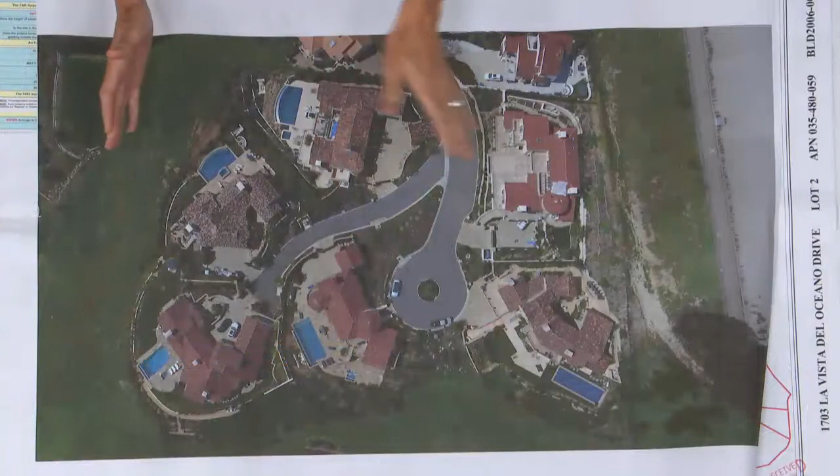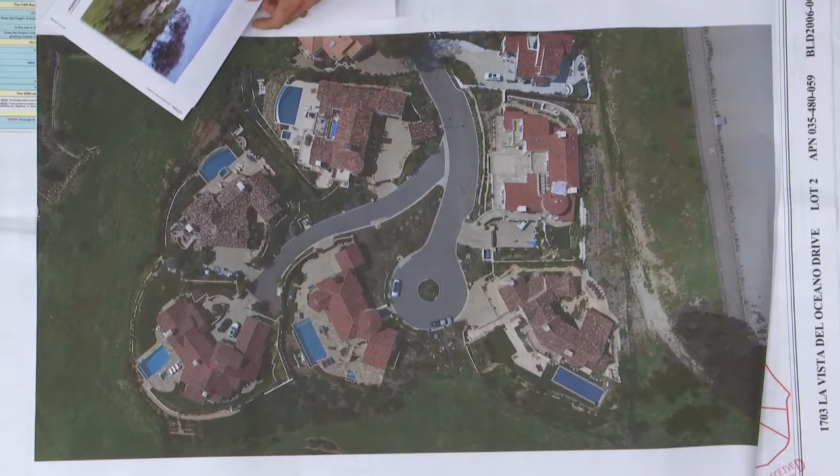Thank you. So these are the 6 lots we're discussing, and you can see they have multiple elevations. This is lot 2, which we're discussing first and foremost. So what we decided to do was get some drone photography done to make it clear all sides of the building, because when you're at the lot and you look at it, it's hard to tell.

Yeah, lot 2. Oh, I'm sorry, 1703, but it's lot 2. Yes, it's this one, right? Yeah, correct. So here, this is the house that we're discussing. This is across the canyon looking back at these homes. Yeah, okay, so it's this home. Here's the aerial - this is from across the canyon.

This is the southeast elevation, which is also, I believe, on the cover of the plans. So we're here to discuss the changes that have been made since the last time the Board of Architectural Review reviewed this project, and we might want to flip through it as I go through the changes. Stephanie Poole was the architect of record - she designed these original plans, and there were changes that were made unbeknownst to the architects in the field. So she was kind enough to come back and do a sort of record drawing of what it is there.

However, there are details she's unable to specify because in this case, pretty much all the windows and doors are different than what was originally on the plans. We don't know exactly which window it was, but we're here to review the aesthetics of what's there and answer any questions to the best of our ability. So maybe if we're going to look at windows and doors, we can go through the elevations and try to indicate where you think the changes were.

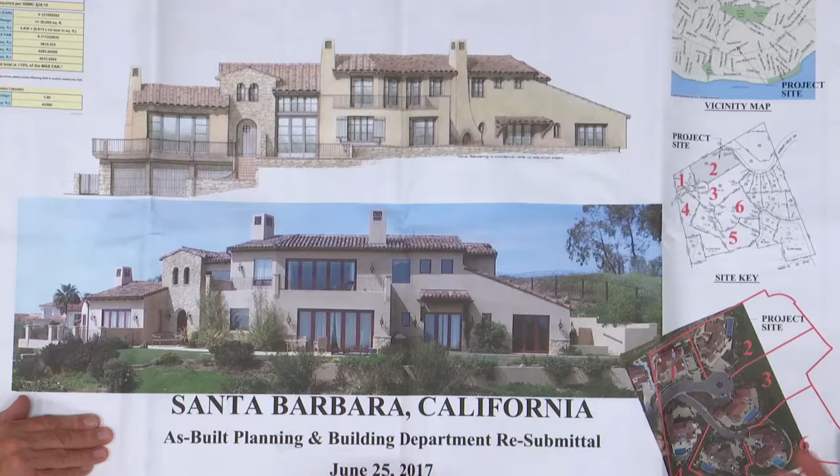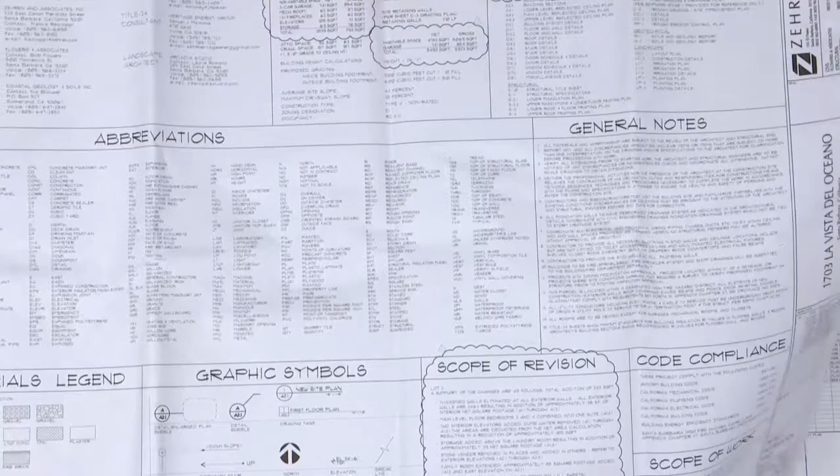So we have a scope of the changes clouded here. All clouds represent the changes we're reviewing today. This lot size did not change as part of the lot line adjustment.

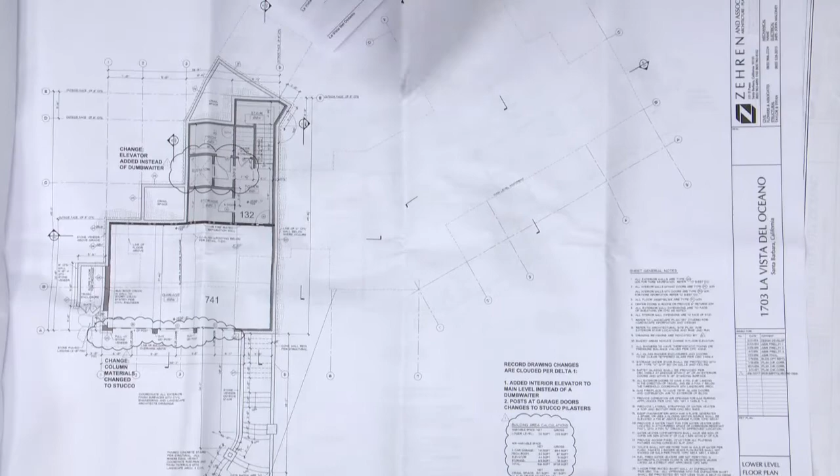Okay, so there was a dumbwaiter. This is the ground floor, there's a 3-car garage. In terms of interior changes, there used to be a dumbwaiter here, and they installed a full elevator. There's actually 2 elevators within the house, as you'll see.

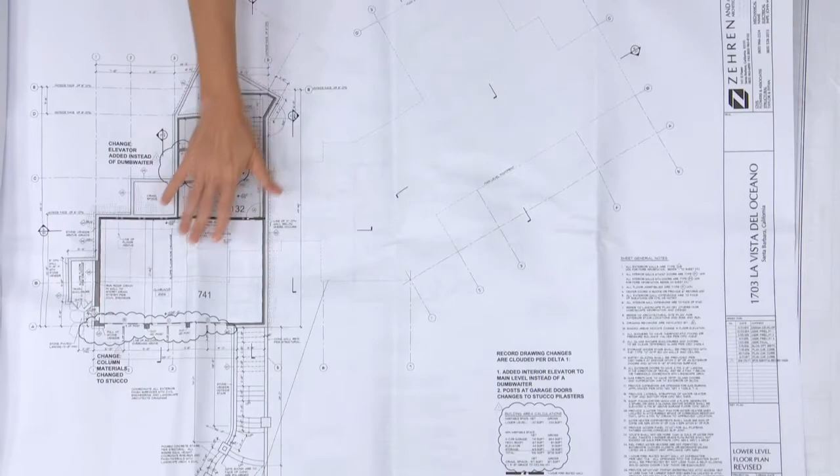So did this outline change? No. Okay. And again, this is over 700 square feet of garage that is now counted, whereas in the past FAR's method, it was not.

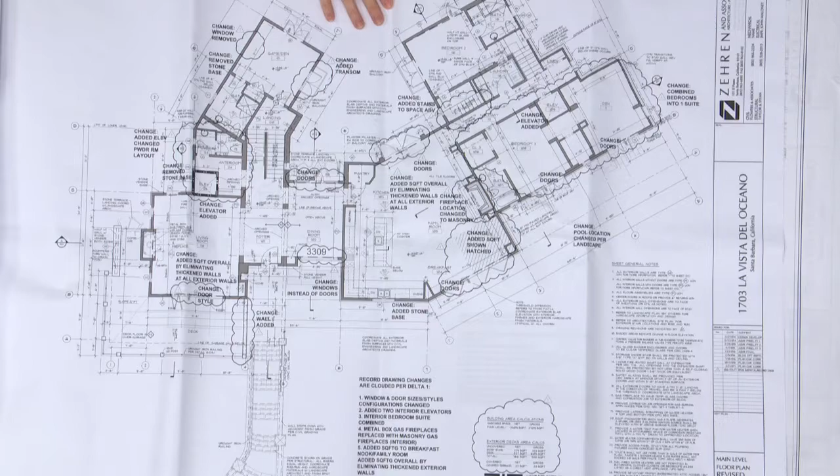Essentially, all the clouds are around the doors and windows that were changed. We had, if you want to speak to it, Stephanie, there's fireplace relocations. The only footprint increase on this project is in the area of this corner of the family room.

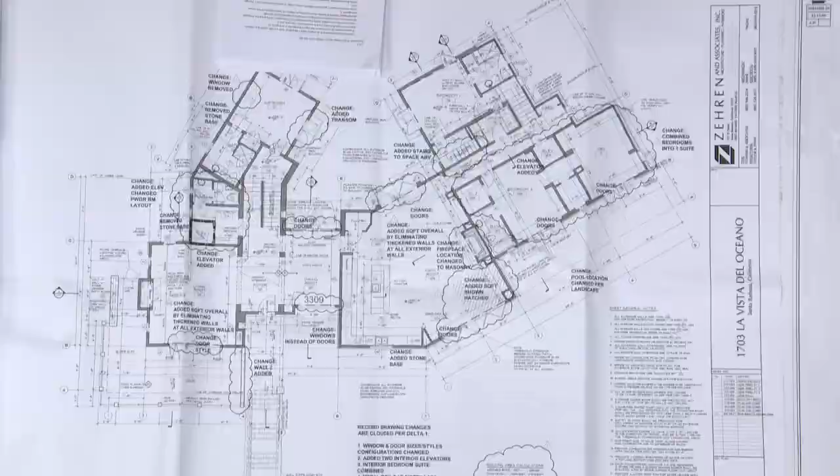Where it was originally cut in, like that, and this area was added. Other than that, the only increase in square footage, like we said, was the garages and some of the thickened walls that were originally specified for the project were not built with the dual stud walls or the thickened walls. They were built with nominal 2x6 or 2x8 size studs, thereby increasing the square footage just on the interior side by that much. It's negligible.

And then there apparently was one exterior change? There's a wall, site wall. The pool was originally built along that entry stair. It was not built in that location. You can see on the site photograph that it was built in another location.

Okay, so just so we go through this pretty carefully, let's go back to the site plan. So where is the pool on the plan? In this photograph, it shows it in this photograph. Okay, so is that on the plan somewhere now? That is the original.

The pool changes are actually not before you today because they were permitted separately, and they did receive a final sign off at the locations. From ABR or landmarks? I mean, not landmarks. We're not 100% clear on that. What we know is all 6 of the pools on these lots all went through city review and got separate permits. They all got building permits issued and inspected.

And I'm assuming then, though, if they got separate permits, then this area is part of that separate permit. Yeah, right, Mr. Chair, yes. ABR did review the proposal to relocate the pool and some of the landscaping changes back in 2007. So the focus of this, all of these home reviews, will be physical to the actual residence.

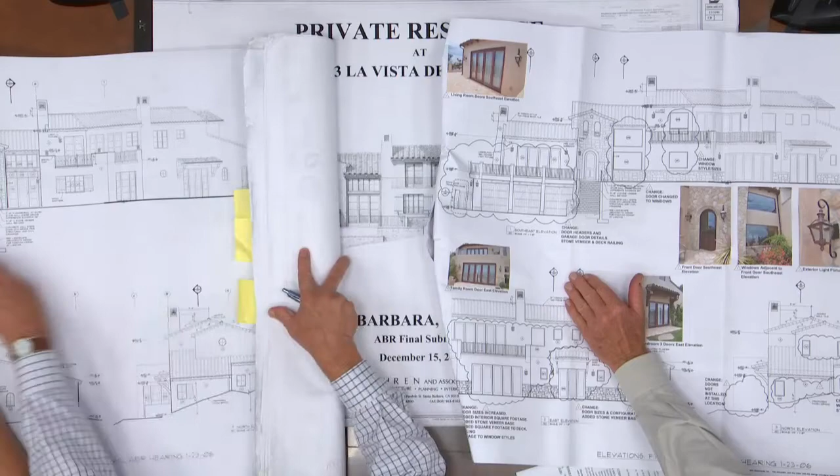Okay, all right. So basically, we have that set of windows that now don't have divided lights. Right, they're shaped a little bit differently from a proportion standpoint. This has - we can't tell whether - oh, it has different columns, wood columns. Had wood columns, it's now stucco, okay? They still have a wood lintel, okay? And we have a different detailed pilaster and maybe a different railing, but it could be the same, okay?

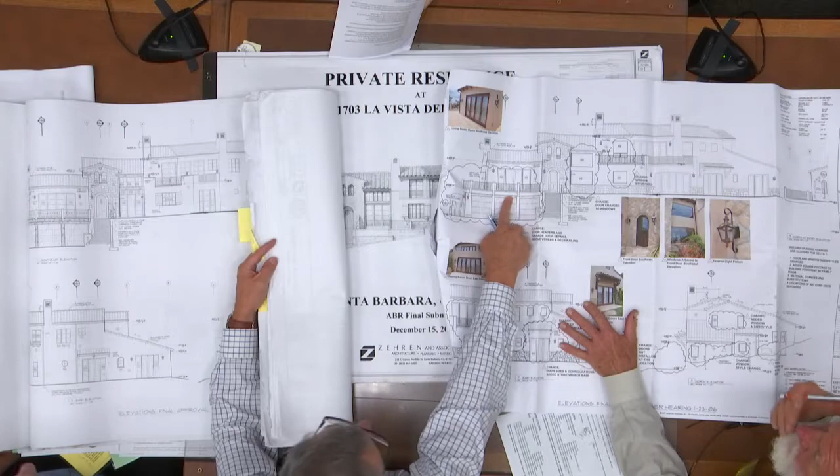All right, then over here, we had - oh, this is, yeah, they made - what are we looking at? This used to have little divided lights and then some large door here, and now it's all just those two big windows. Two big windows right here. Two big pictures. Those two windows, okay?

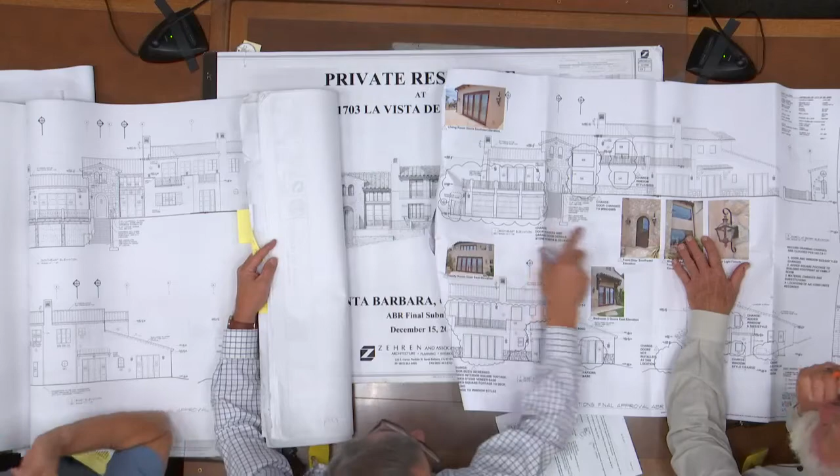And then we had - where are we at now? Okay, those two windows are now this? By the way, these are now that. Right, so what went away? Was this sitting out proud of that surface?

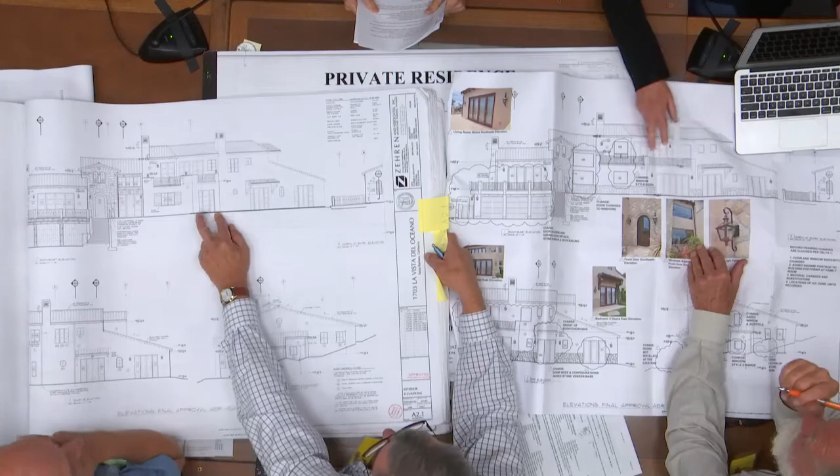This is the area of that increase, and I think this is where the building takes a little turn, right? Turn, yes. So this has got filled in. That was where the piece was added, okay. So those windows are new too, right?

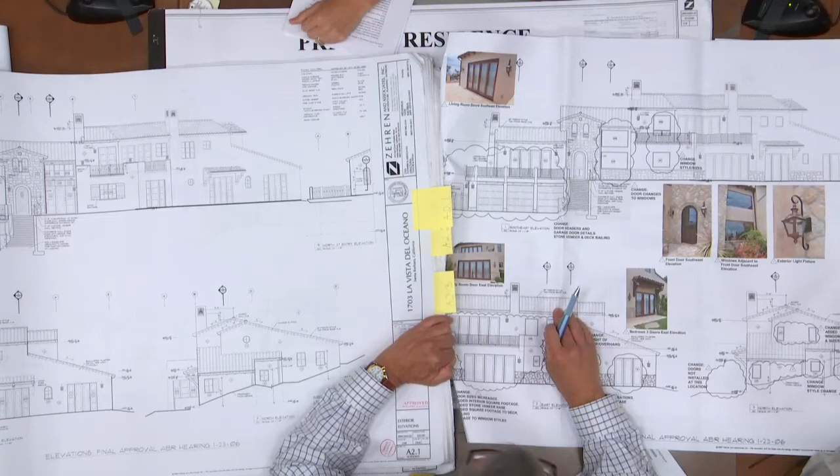On the upper floor, yes, a large expansive - okay, so there should probably be a bifolding type door around those guys. So because we don't have it - it's down here. Oh, here it is. Because - okay, gotcha, it's not a four-sided building. Yeah, you're switching elevations, okay. So we're up there, we got this, that's what got put in, this got put in, and they're probably detailed differently than the way these were put in.

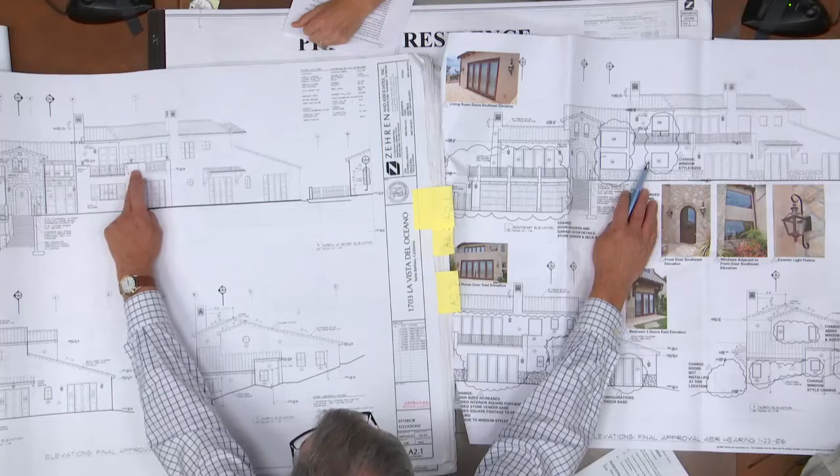So these had shutters, and okay, so this still is proud - there's a terrace still in front of this thing, it just didn't get built this way, and it didn't get built that way, okay. All right?

Where do we look next? Well, why don't we do this to make it easier on us? I'm going to do it a little differently than we ordinarily do it. Let's stop right here and get anybody's questions on that elevation. Anybody got questions? Okay, all right, now let's go to the next elevation, which is...

So it's this elevation, or what are we looking at? That one? You know, I think it'd also be helpful for all of us, if we point out which elevations are the publicly visible elevations. I think we have like six to eight elevations per house sometimes, but really there's like one or two that the public can see or that's prominent from anywhere. So we should make a point of letting you know which those are.

So how about we point to also which elevation by looking at the aerial photograph? Okay, so this elevation's got a change on it. How does that compare to this sheet? Is that this? No, it's this one? Is it this one? That tab didn't get switched. No, I mean you need to turn the sheet over, the corresponding - okay, so what are we looking at?

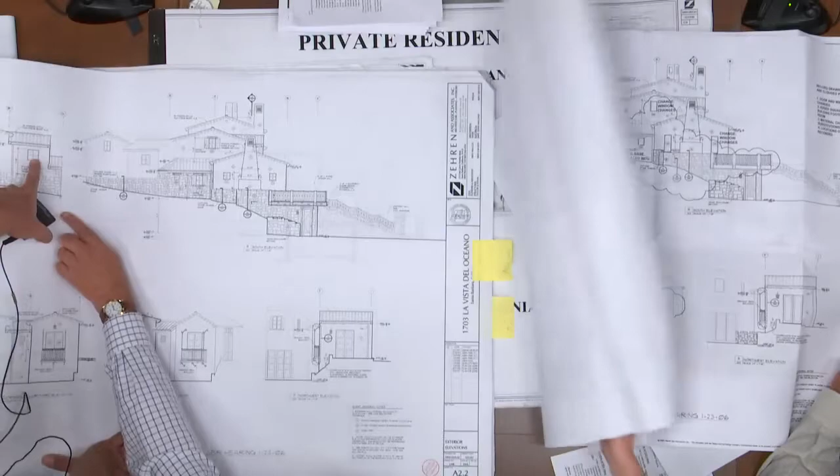Which one? That's the one... oh okay, they took the window out here and added tabs on this sheet.

There's no mullion, they've taken the mullions out of it. So the divided lights went away, and that window went away. Any questions on that one?

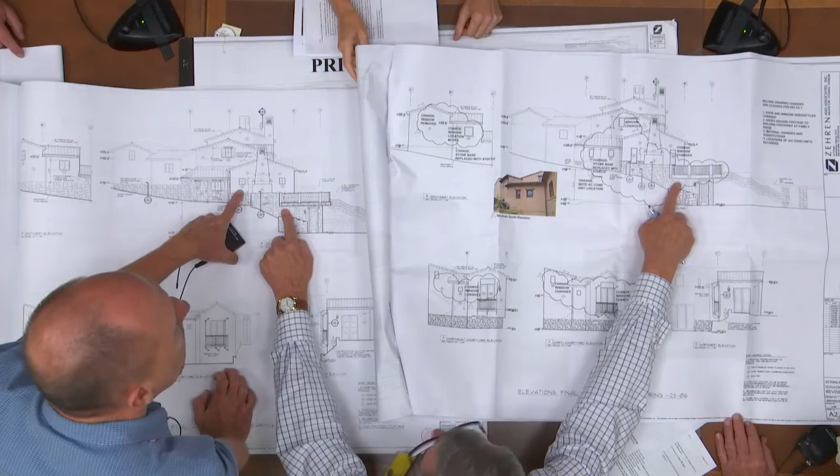Where to next? Right here, that's the same as this guy, right? Okay, so this is slightly different. Oh, and they put stonework here. No, they only put partial stonework, then took it out.

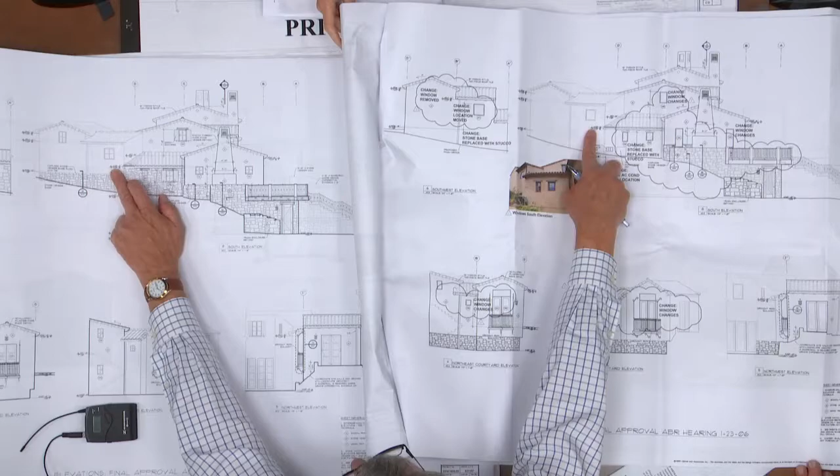So they took all that stone away, then took the shutters and lintel off. That window replaces that window. These two windows replace these two windows. That's the one we've seen on the corner. Any questions there, guys?

All right, then where's this guy? Right here, so they added a clerestory window above the double doors. And the balcony is kind of the same.

That's not a window? Is it? What's happening up there? Yeah, it is, a clerestory window. You got a photograph of that? Okay, all right, any questions there?

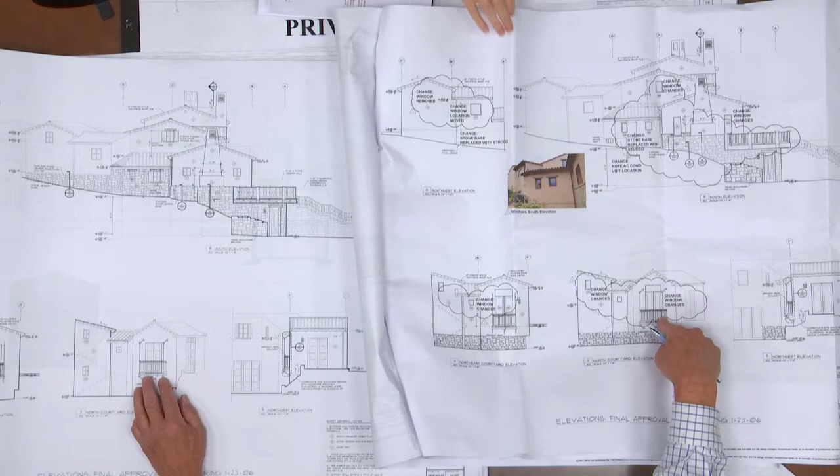All right, then we're going to here. That's just that, right? Okay, was there a change in this little balcony from what was approved, or no? It looks like it's the same, maybe just stylistically. Still got a little curly Q, so it's kind of more or less the same.

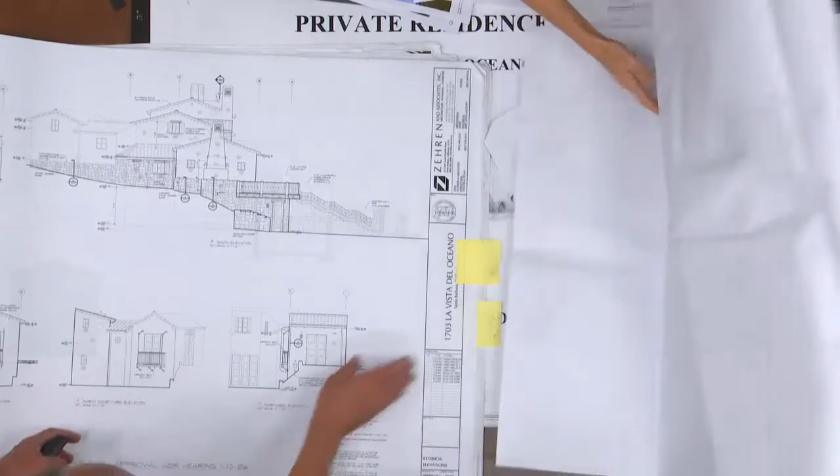So here and here, the windows got changed from this arrangement. The stone went away, the balcony is still there. Oh wait, stone got added here, this is new. So stone got added over here, the windows changed.

Those doors lost the divided lights, and the balcony is still there, and this was some kind of plaster. This was round and it's become squared, okay. And that little window is there, but it got changed in how it's used.

And what are we looking at? Oh, that's the same elevation, that's this door area. These were two French doors and now it's a triple slider. A window up here got changed too.

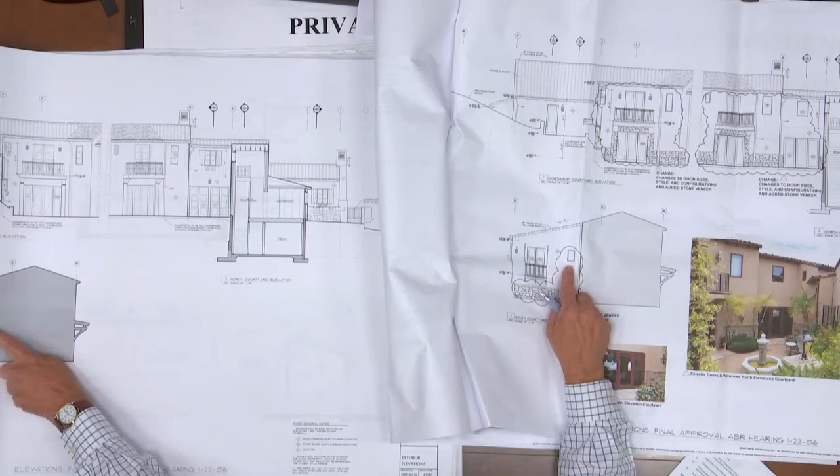Okay, and this is the back of the house, right, facing uphill. Where is that guy? Over here, so that got changed, but there's nothing above it, it's right to the top of the reservoir hill, not visible to anyone.

Okay, let's go. Did we cover everything? That's it in terms of the elevations. We can go back to the floor plans if you want to compare those.

Right. I think we were on... this is where we looked at that, we looked at that, looked at that, we looked at that.

Looked at that, looked at that, looked at that, and we looked at those things, okay? That's the interior courtyard that faces uphill.

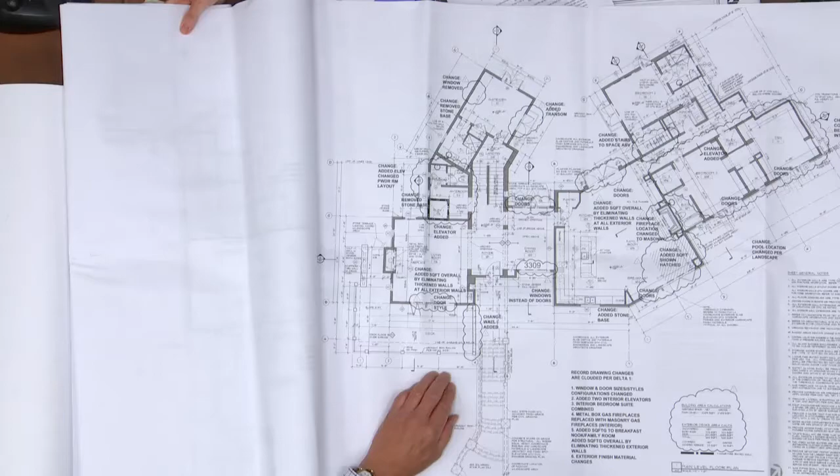Interior changes to the layout of this room, and this is where the second elevator was placed, put in. But that didn't affect the exterior at all?

No. And the only change here is the fireplace got moved, so I assume the chimney stack is in a different place, correct? Correct. But it looks the same?

It's only slight, because it was designed as a 45 in this corner, and this chunk was out, so it's kind of in the same place, wasn't here, so it's really close.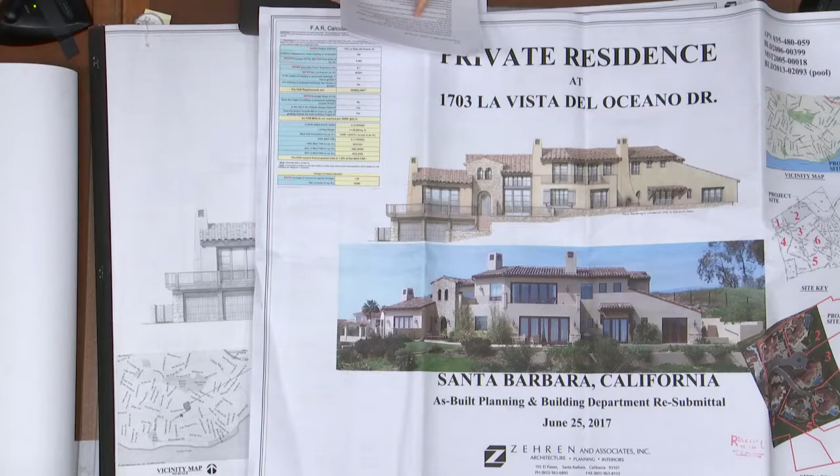We discussed the wall thickening changes. We combined that 3 and 4 bedroom on that floor, which did not change the exterior. The elevators, we discussed. There was storage added above a laundry room. We could look at that. Okay.

That didn't affect anything outside of the house. This is the laundry room. You go up half a flight here, and there's a little closet, and they just created this storage area up here. It was basically designed as attic access. We weren't sure if it was usable space or not. Whenever the contractor found space that he thought was useful, or slightly useful, he finished it. Okay.

Okay, so we discussed that. The stone veneer was removed in some places and added in others, as we saw. The family room was extended approximately 85 square feet in that corner, like we discussed. The windows and doors changed.

We had a change of windows from doors. We had folding glass doors added in places where there weren't otherwise folding glass. The fireplace moved.

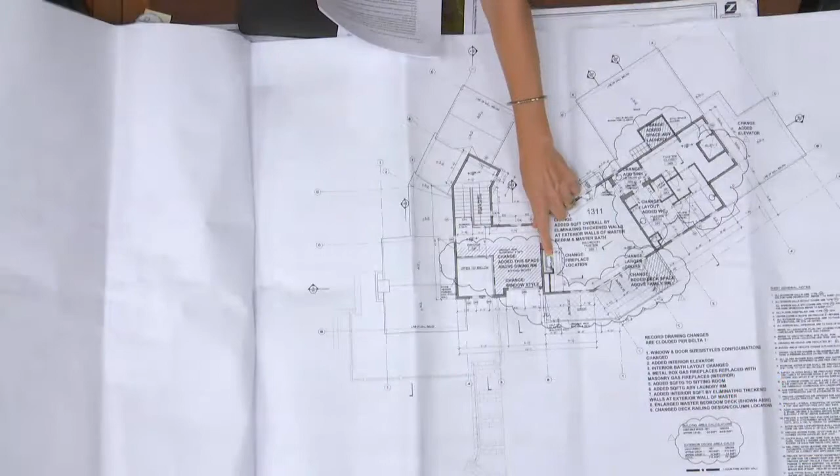There was the second floor and this next floor where this was essentially a loft type — it's a bridge. And that got filled in? Exactly. Okay.

And we discussed the pool relocation was under a separate permit. That's it, that's it. Okay, was there — what was going on there, that place above the first floor where we increased the footprint? Okay, no, we didn't, but it got done.

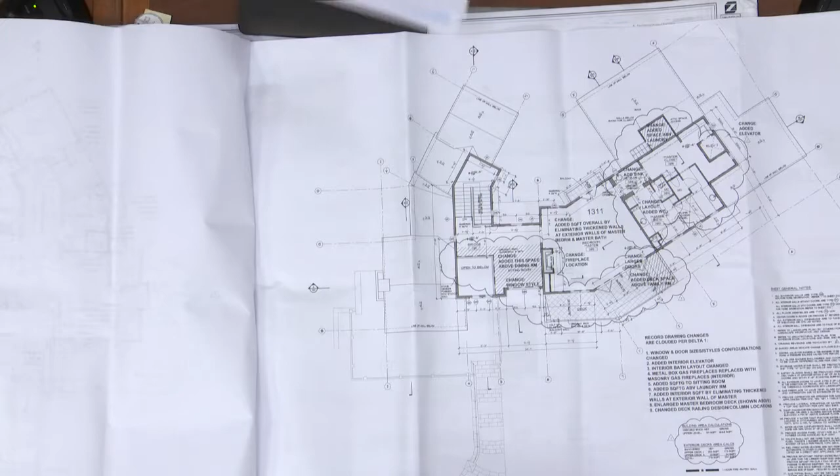One other general question on the doors and windows: typically this board looks at what's been specified. Is it metal clad? Are they wood windows? What happened there — are they generally more or less the same kind of windows? Yes, they were metal clad — aluminum clad wood windows. They were Sierra Pacific specified. There's something else now, but it's still metal clad wood windows, I'm not sure. They didn't put in vinyl. No, so it's still metal clad wood windows.

Yes. Okay, were there any significant exterior light fixture changes? Did they move, I mean other than — we didn't really get real specific with those to begin with. We had, I don't know if in the original drawings those were blessed or approved or whatever.

It also appears that the roof tile system — that's one thing this board looks at when we look at this style of architecture — appears to be traditional two-piece mission clay tile. We've got two starter rows. Looks kind of like it's all supposed to look. I was out there this morning, looked at both these houses and the other ones, so I'm going to have a question on one of the other houses.

Okay, anything else? I don't believe so. Is there any further questions from the board? Yes.

Has the landscape been significantly altered? Generally, no — some of it's died off because of the drought. The landscape plan is over 10 years old, so it hasn't been wholesale replaced with any new types of landscaping, but it's thinned out because of the drought. I think also all of these homes have a very limited amount of area to plant because there are such steep and sloping sites, and they eventually just all go to natural outside of the building envelope area. So they're only developed immediately surrounding the house.

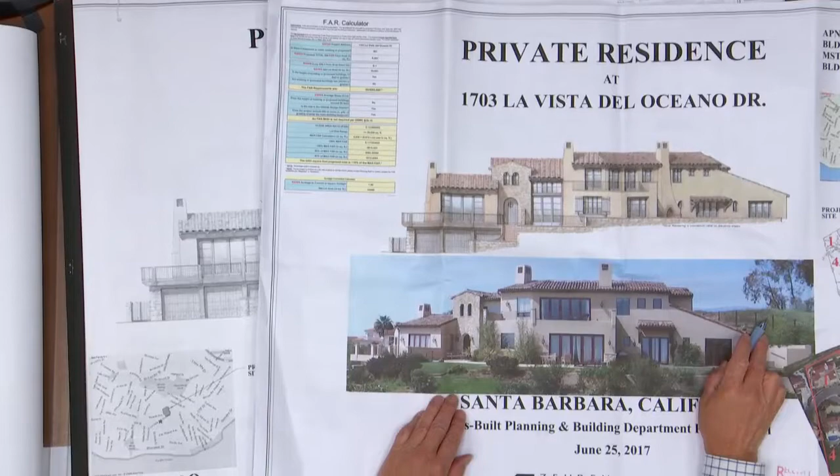Okay, I did have one question on landscaping — or it's not, it's kind of architecture related. Let me go back to this front photograph. This fence up here appears to be — are we allowed 8 feet or 6 feet without any special review for fences? I don't recall, it'd be 8 feet. Because it has this curled out shape, so was that blessed as part of the landscaping stuff, or we don't know?

Mr. Chair, I'd have to investigate that. All right, thank you. I believe that fence is actually the Vic Trace Reservoir's fence. Oh, okay, so that's a city fence, there's no fence from this property. That's why it curls towards us like that — to keep us out. Okay, I was looking at that and wondering where that came from. Okay, that's clear. Any other questions?

All right, well we're here for comments, and as I understand it, we're here to review and make comments. We can either make comments and have the applicant come back with changes, or we can say everything looks fine and give approval for review after final. Is that correct, Mr. Chair? More or less the two options. Okay, all right, let's open it up for comments to the members of the board. Share your thoughts, Lisa, you want to start?

I'll start, yes — that the changes have been well presented and don't offer any... there's something going on with my mic. Is it working? You may need a new mic.

The changes that the applicant is proposing don't pose any significant aesthetic issues, and I can support the project. I'm going to support it as presented. Yes, we've covered everything. I think the revisions are fine with me.

Those are cheap-looking windows. Even though they might be wood metal clad, they ignored the details. They didn't set them back in. These are all more or less south-facing, they take a lot of sun. The original design took that into account. It's just really disheartening that somebody's going to spend a fortune buying these homes and they're not getting what they should have gotten.

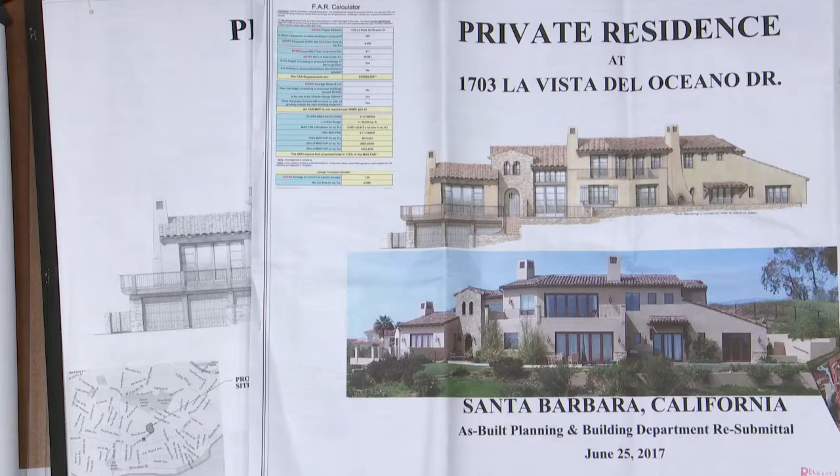And I can understand - we've had many clients come to us and propose a lot of stonework, and then they find out what it really costs, and they come back and say, hey, we got to take the stone all off, and we say, okay, fine, we understand. But we also understand all this stuff costs money. It's just really, really unfortunate that somebody made a decision to not spend the money in the proper place, particularly as pointed out by the folks sitting here at the table today, particularly on the public side where we all have to look at this stuff. Somebody spent a lot of money on a very nice home, and yet they've got some really cheap solutions. So, in one respect, I could put my foot down and say no, go back and change all these windows - get it right. But as has been pointed out by my colleagues, that's a tough decision.

I know that you recently made a similar decision on another project, which I was against and expressed my opinions, and in fact was in the minority position on those votes. So anyway, those are my comments. If there are no further comments or questions, then the chair would look for a motion.

Mr. Chair, if I may, I'd just like to point out that they do have to pay double fees when they come before you for as-built work, but in the realm of how much these houses cost, that's nothing. I'd also like to point out, if you do decide to request that they make alterations, please cite a guideline for why you don't support the as-built changes.

I have a question: did the contractor just do these on his own? They weren't sold yet, they were just being developed. That's what happened, and I agree with everything Fred is saying. All I would clarify is that what you see in the photograph is actually what was present when the people purchased the house. But yes, they did dumb down the window details and things. The contractor did, on this project in particular.

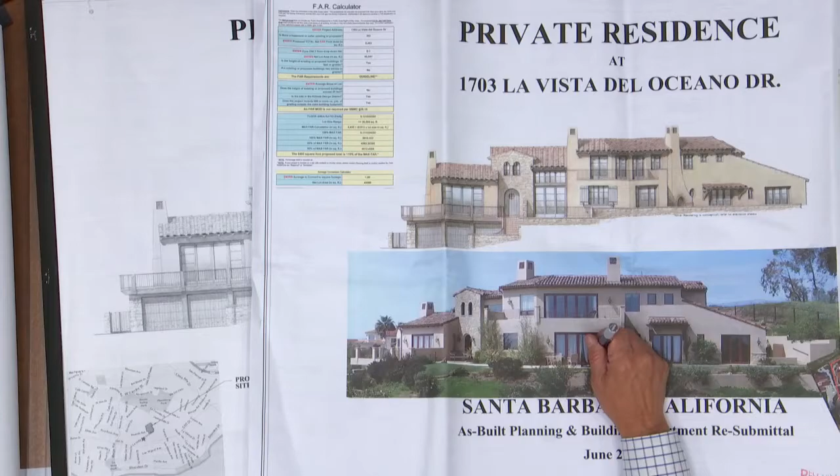Chair would entertain a motion.

Nobody's ready to make a motion? Okay, I'm going to attempt a motion, and you can vote it down. If it gets no second, the motion dies.

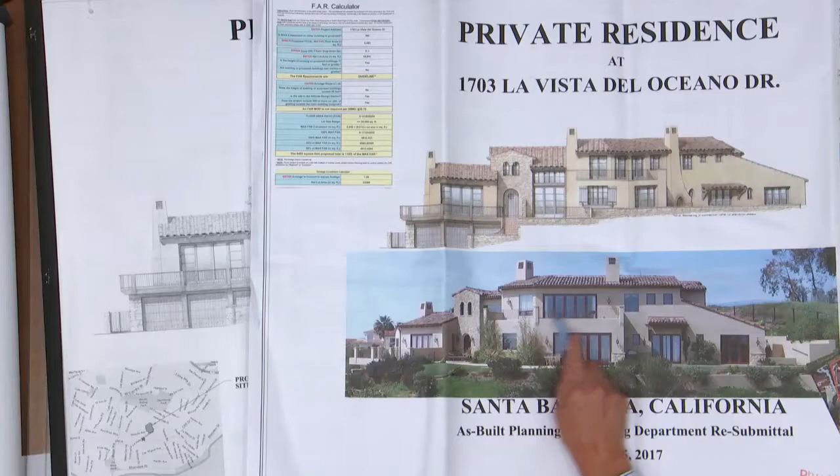But I will make a motion that we require the applicant to revisit and return to the board with a design that would adopt the original intent of the approved design for this window, that window, that window, and this group of windows, and this canopy.

I'll second it. There's a second on the floor. Is there further discussion to the motion? Okay, that's the motion on the floor. All in favor signify by saying aye. Aye. Opposed? Okay, so carried.

So we'll have to see you come back. One opposed? You're opposing. Okay, so we have a 4-1 vote. Any abstentions? Okay, so that motion is approved, and you'll need to come back and show us an alternate approach to dealing with those group of windows.

Could you please circle the windows? Probably for the record, we better point out the elevation points. Let's see, the windows are numbered. This one here. Okay, 205, is that correct?

That's the second story. A circle on the elevation might be best. Take a pencil, circle all over. Use a red pencil, that's better. Thank you.

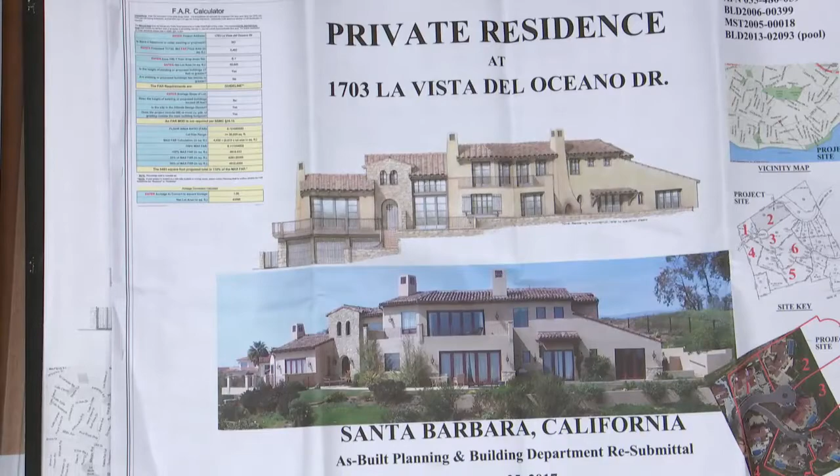If you could do it on two plans so I can have a set for the record as well, please. Okay, that one, that one, that one, that one, that one, and this thing. Okay, so do we have another set to mark up somewhere?

Actually, maybe keep it over just to be sure they match. Okay, and that. Whoops, and that guy. Okay. That's the action on that project.

Do we have a minute to clear all this stuff away, or do we have another set underneath there? Can I have one of those sets of plans?

Sure, that's not what I had on the floor, that's not. This is the old plans, and they're all... okay, yeah, here's the other one. Here, check this. Yeah, we need to keep one, so you know what we're talking about.

Okay. We want to, could've pulled that aerial back. Take all the windows, but pull that aerial back. At least some of it is still to go.

Okay, let's go to item 2, which is 1706 La Vista del Oceano.

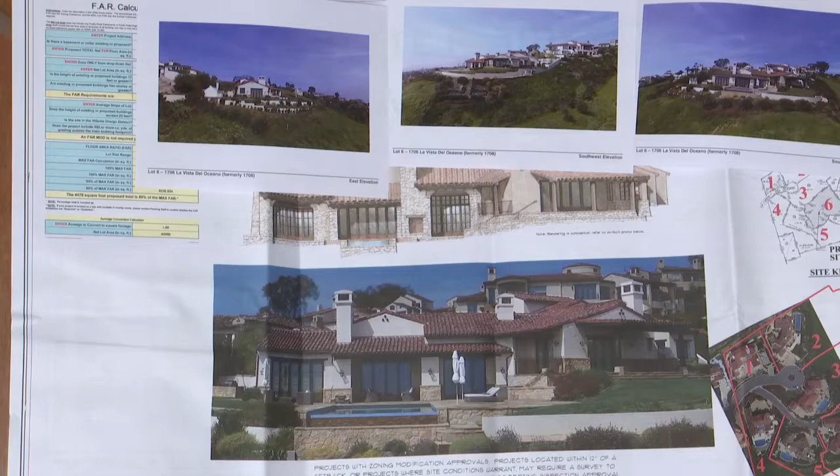A trash enclosure was eliminated in lieu of a site wall that was in place. And an outdoor shower was added, and a mechanical room was converted to a powder room that's used as an outdoor kind of potty for the pool. Okay, or potty. Yeah, okay, all right.

So if you could point that out on the plan and the elevations, please. Just pass these along if you want to look at them. The outdoor powder room is not conditioned space, so it wasn't counted in additional square footage. So this, what was the second mechanical room, is an outdoor bathroom, and there's the shower.

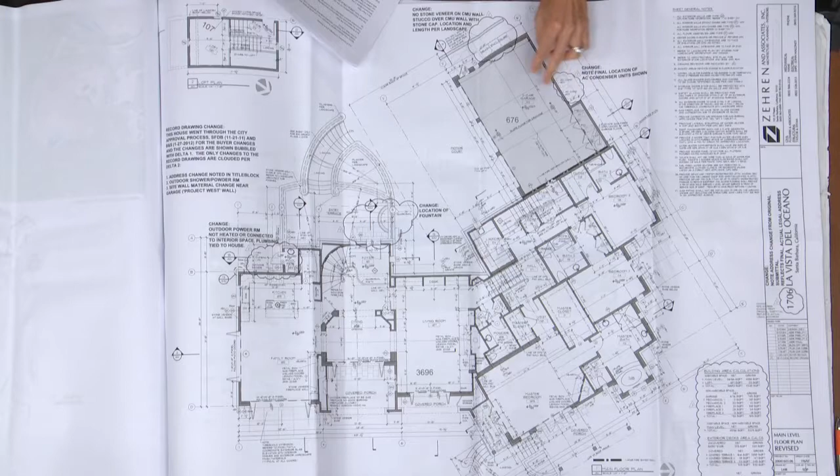There was originally the fountain by the front door was on this side. It's now on this side. The trash enclosure wall along here had stone veneer, and now it's stucco with a stone cap. The air conditioning units were added. And we'll see on the elevation the garage doors, and the same thing where there's stucco in between the garage doors.

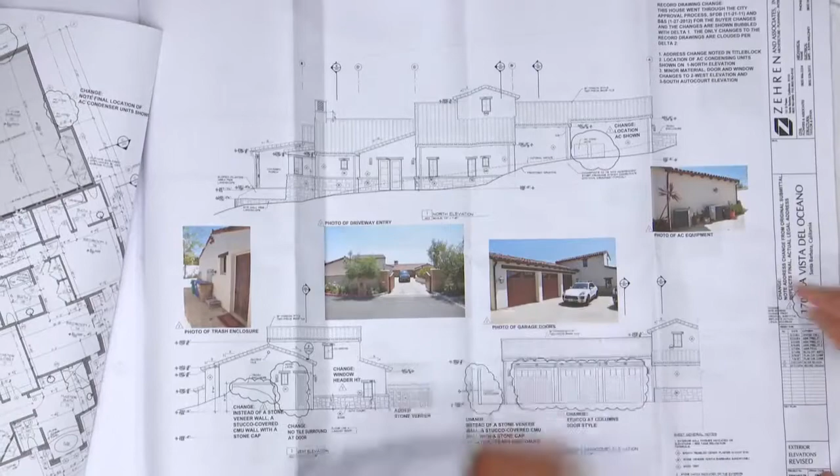Okay, so those are just the locations of the air conditioning. And just to be clear, the stucco in the garage doors, that was previously reviewed in 2011, correct? That's not clouded here. Right, because we looked at this the last time. The garage doors are clouded. Got it. Right, we looked at this the last time it was before us, because it did come to us.

And we do have the building sets of plans underneath if you want to use it as a comparison. Right, so these got added, is that what we're saying? They were never shown because mechanical was design build. Right, and there's no zoning setback or anything like that, okay? No. Right.

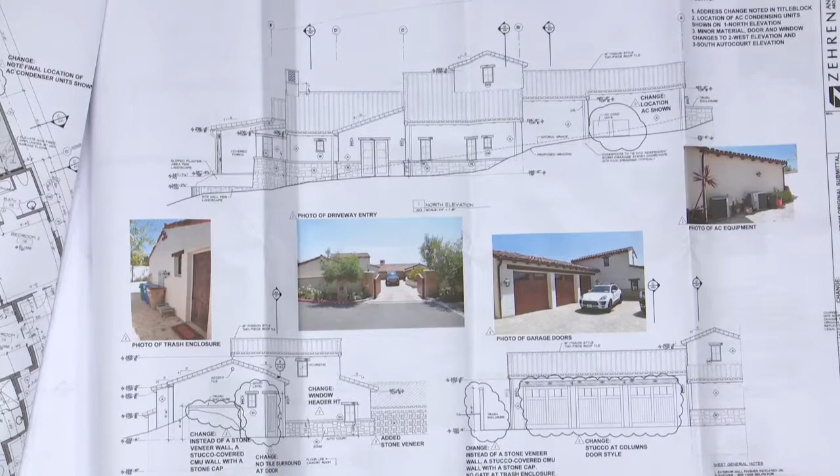And this is the little fountain that got switched. What happened here? Just the front door. The shape of the front door was changed from an arched door to a rectilinear door. Same here?

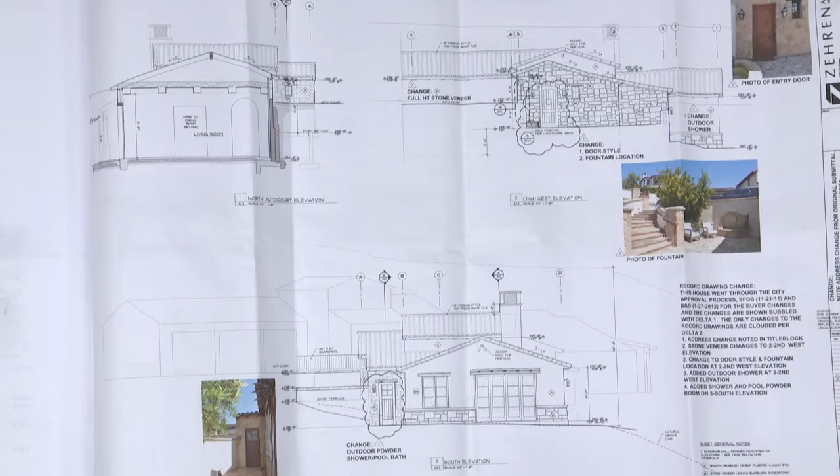Anything else? That's it? Okay, questions? Anybody have questions? Okay, no questions, let's go to comments.

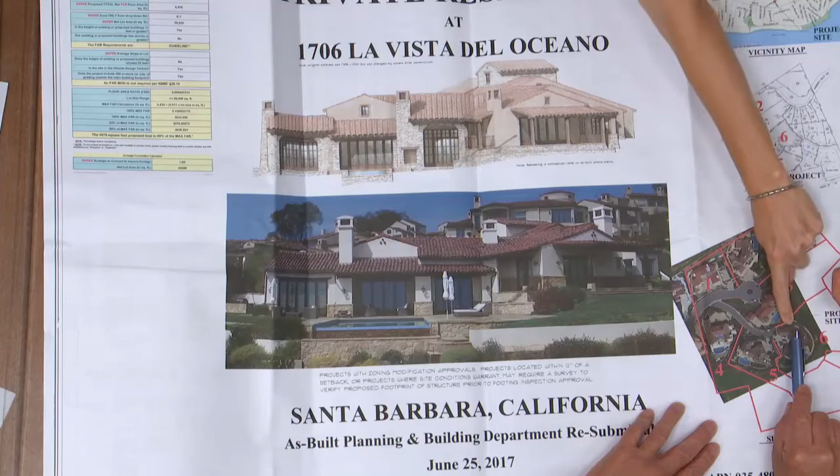The only comment I have is what's the aesthetic impact when you see those condensing units? Are they well hidden? They're very well hidden. There's a huge site wall, and it's really not visible from anywhere, even from the site above. It's so steep with the terraced walls from lot 3 to lot 6. It's not visible at all.

They're right here. Have we had any noise issues with these neighbors about the use of the condensing units? No, not aware of any. Okay, generally that's the thing people complain about, even if they can't see them, because they can hear them. Anything else?

Okay, if there are no other questions, do we have comments? Anyone? I think, aside from the frustration that's after the fact, I think the changes are appropriate and don't cause any size, bulk, or scale issues.

No changes to any fenestration or any doors, except for the front door, nothing? No, other than that. Not like the last project. Correct, these are just site, little garbage condensers.

Like we said, we went through the changes with the Single Family Design Board when they occurred, when the property owner bought the property and made the changes. And they were here before us, so we went through a lot of this already.

So, Robert, any questions, comments? To me, the changes seem appropriate and seem like somebody else previously reviewed them, so I think this works out fine. We don't mind a few little changes, but when they're wholesale, it's a little tougher.

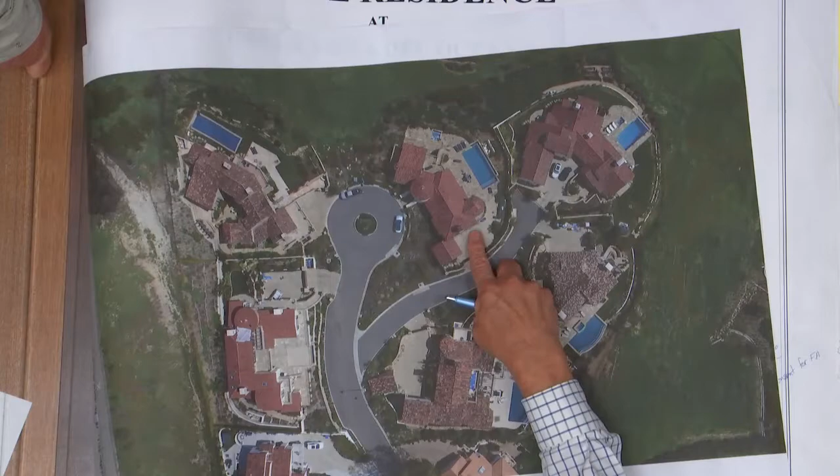On that side there were a lot of trucks out here, a lot of workmen. They're working on that house and they're working on this house. I didn't have any drawings for reference, but just a heads up, I'll check on that, and when I come back I'll tell you what they're doing.

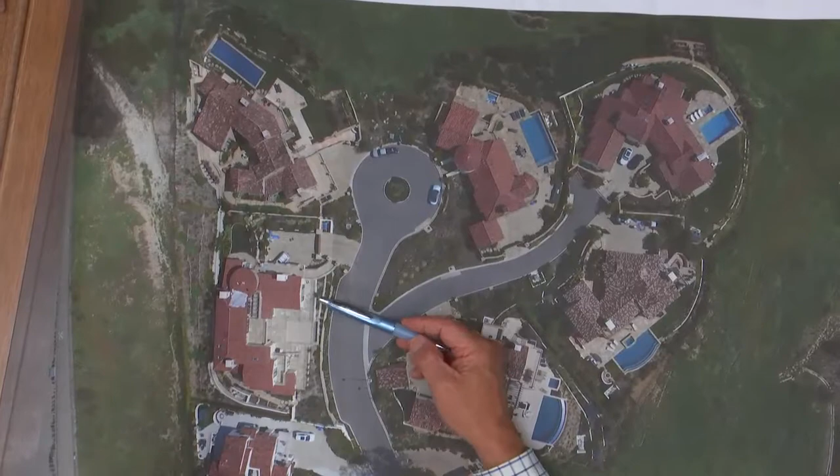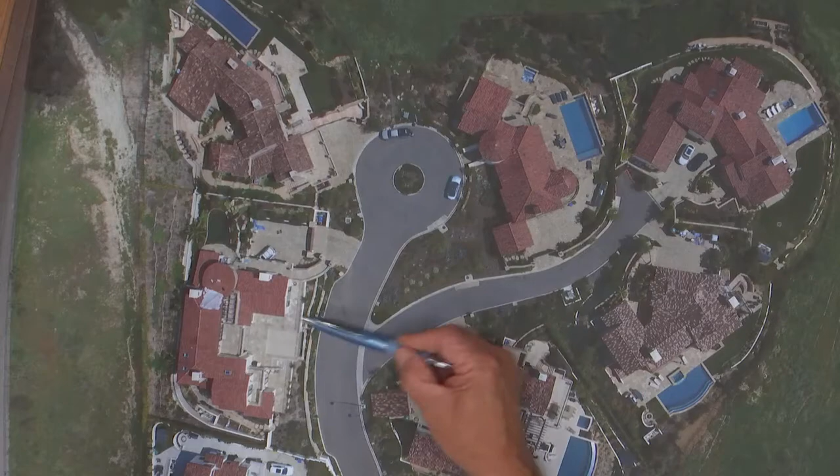For sure, with this house there are some defect repair issues, guys doing the roof this morning. So they may be pulling something off and rebuilding it exactly as approved, but there were some issues with the construction. There were roofers up here. But this house, we did review, because we reviewed this pond or waterfall thing over here.

This may be similar, though, this may just be a defect. And then I also noticed that over here there appears to be a new trellis. That project went through the Single Family Design Board for that additional trellis.

Okay, we'll cover it when we're here. Just be aware, we're out there looking at this stuff. We don't just sit here and not see it. Okay, thank you. All right.

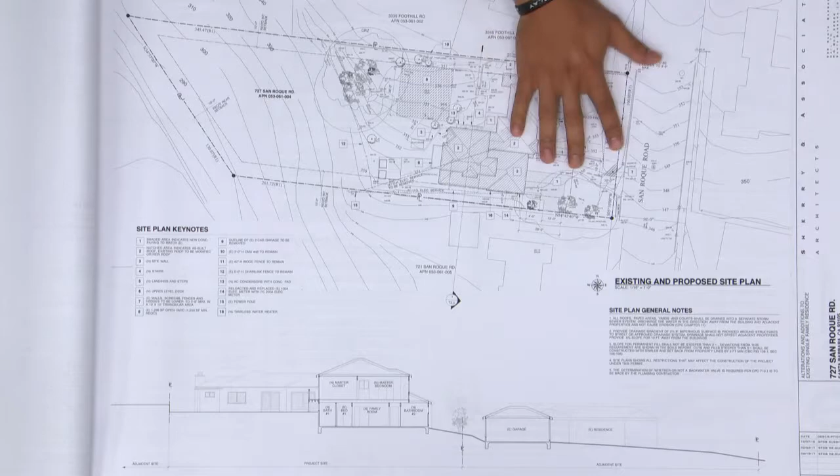Part of the correction for creeks was we need to make the driveway permeable. I think there was a correction from Jim Rumbley that we have to make this with pavers. So I got actually a revised set of plans for those, for the civil. Is that on this set? It's not on this, I just got this one this morning. Jim Rumbley said we won't have final approval until we address those corrections.

So I'm going to have to swap those. I guess I need to pull that out too. Okay, so with that, Katie, do we even have an opportunity to give it final approval today?

I saw the email from Jim Rumbley. He said that they could get final approval. There were a couple of changes that they'd have to make in the building submittal phase, but we could give it final approval today. Thank you. So this is the color, obviously, for the garage door.

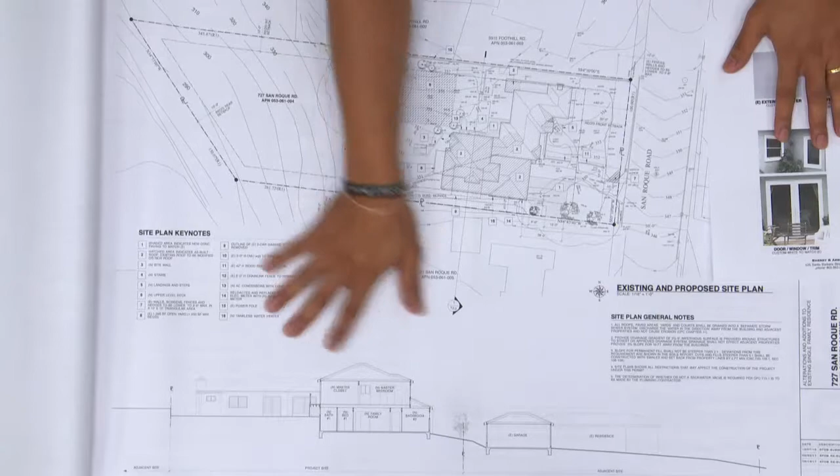And let's see, this is the section through the site right here. So these are the civil sheets that I need to replace.

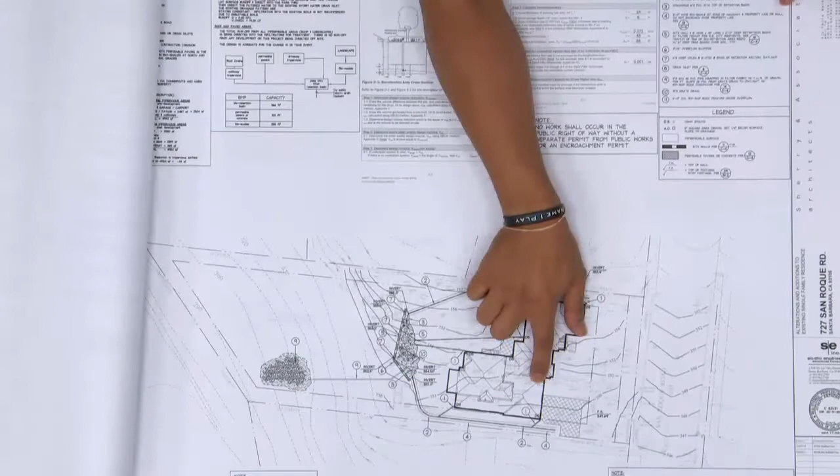So originally we had that driveway right here, not called out as, I think, permeable. I think it was the fire truck gravel. Yes. So now it's permeable pavement, yeah, it's permeable pavers.

And we're taking that all the way through to the whole site right here. And is that also happening here? That's right. Okay, let me double check if the project manager included any details.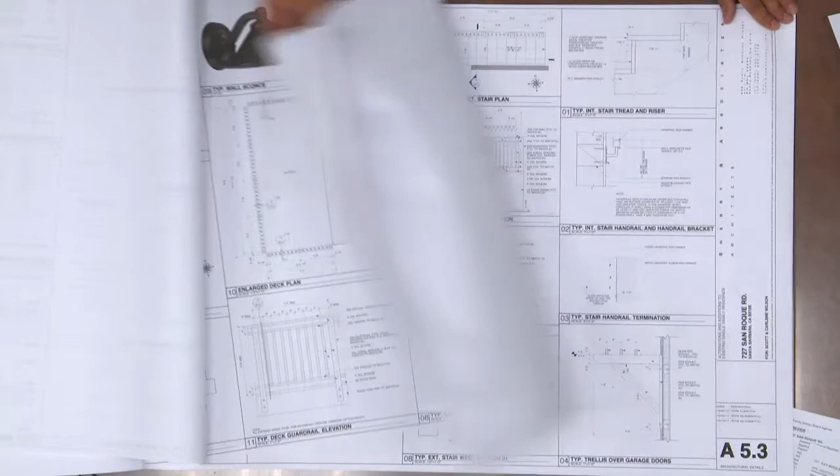So the garage door, I think it should be here somewhere. See, it looks like the garage, typical cement plaster wall. See if it's got anything on the... little trellis overhang details there.

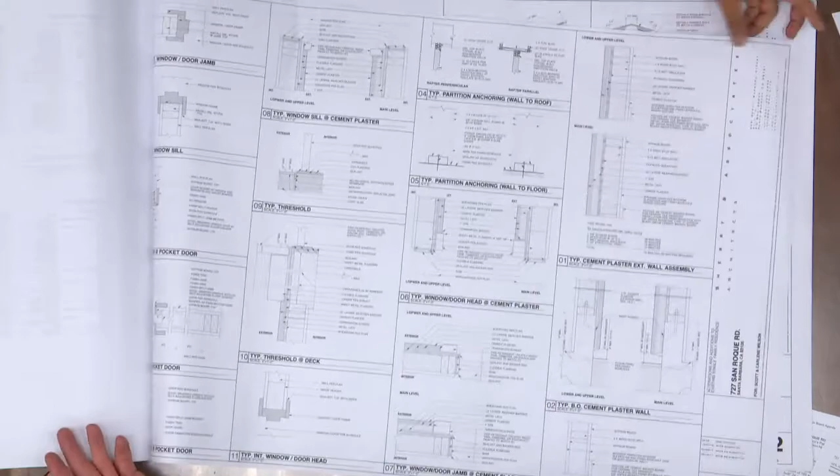I think we just missed it here. Is there a detail mark on the elevation? Let me check. Okay, there's no detail mark. So...

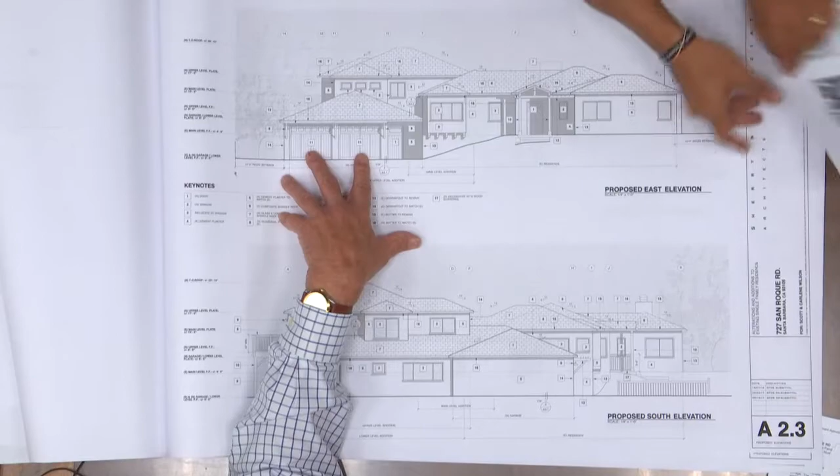Where's the picture again? Okay, so that's these guys. That doesn't look quite like what's shown here, but there's no detail of the jamb or anything. Okay, right?

So we really didn't get garage door details. Let me check on that. We got the trellis, but we didn't get the... maybe I'm just missing it on the sheets right here.

No, it would have been... well, okay, A51 and A52. What have you got? Maybe it's a 6. Window, door head, no. Pocket door.

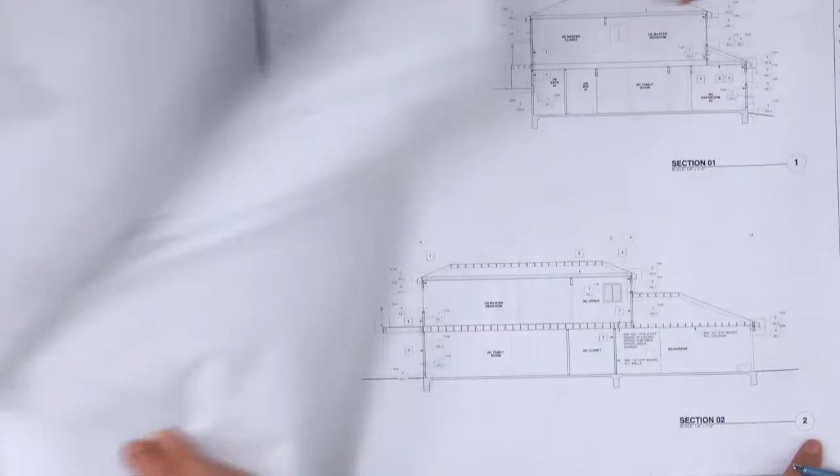Wait a minute, pocket door, let's go back and look at the numbers. What did you see? There's a section. So it was 2 and 6, 6 on A51. Let's look at 6. Those say window door heads. So that isn't a garage door head, or it doesn't say similar. And 2 on A52.

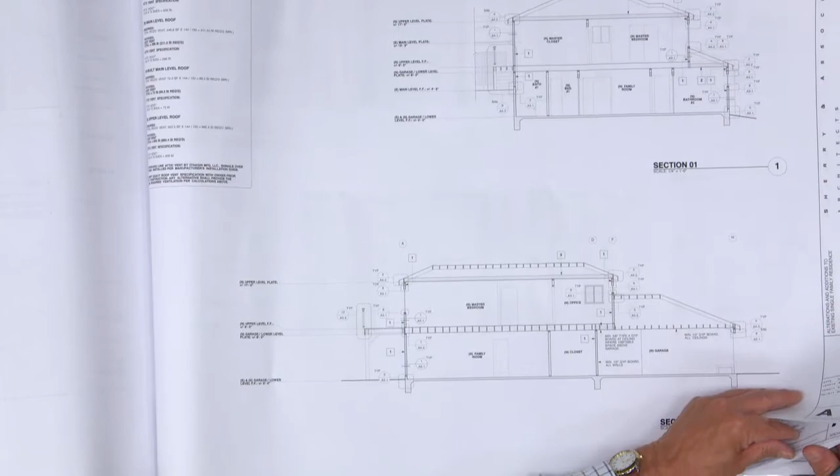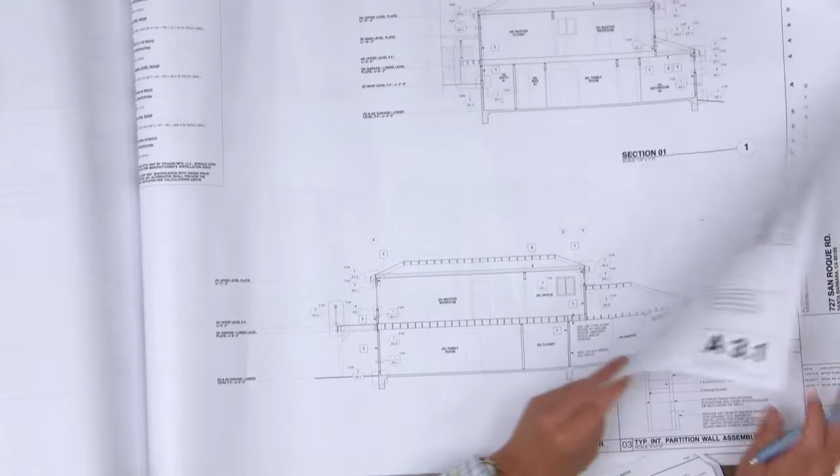Two on A52, that's the rake. That doesn't jive with where the details cut. Well, it's that piece, but that's all it shows. Should be 6A51. What if it's in the structural? And it says similar. Okay, wait a minute, let's see. 6 and A51 shows the header.

So it shows a header with the trim piece. It's stuck on top, and it's just saying it's going to be detailed similar to the way they're detailing in windows.

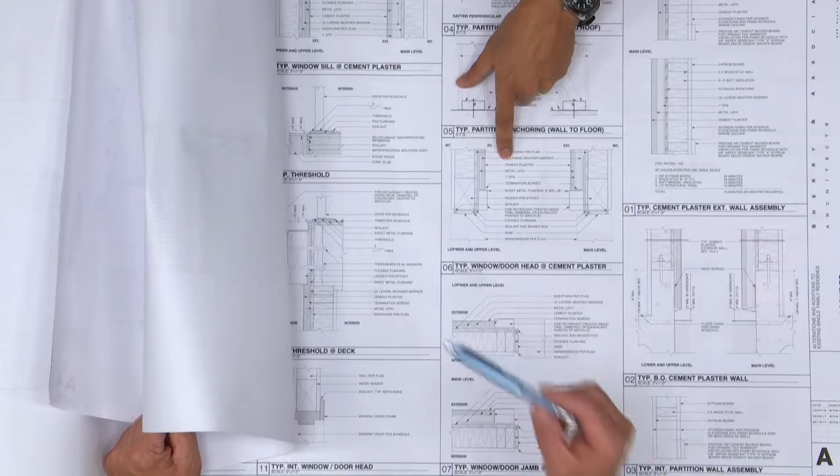So we talked about the driveway, we talked about the garage door. That was basically it in terms of details. Anything else? Do you have a sample or color of the paving material?

Yeah, so this is Scott, the homeowner. So do you have a pattern? I don't have a hard sample. Does it show a pattern on the civil drawings you just got, of what the driveway looks like?

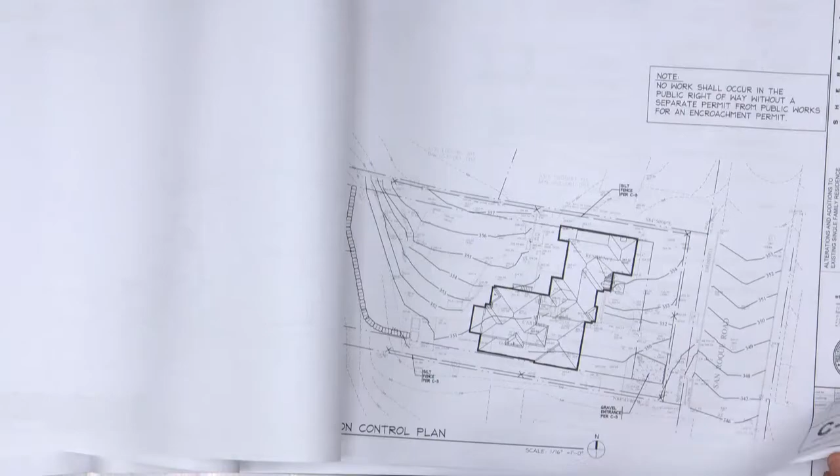Driveway is currently concrete. No, we understand that. Okay, let's see what the civil engineer did. Barrier. Did he do any details? Okay, I don't see anything. Okay, is that it? Okay, right.

One thing I forgot to do - anyone in the public wishing to address this project? Seeing no one come forward, I'll close public comment, bring it back to the board for questions.

Who has questions? No questions? Okay, let's go to comments. Applicant's trying to get final approval. We're dealing with the driveway, the details.

Details - we don't have a color or what the paver looks like, so we don't have that. And the doors as drawn don't reflect what he just showed us in the photographs. And I'm not sure I'm real clear on the detail, but I think they basically haven't given us anything we've asked for. I think you left and came back and thought you did.

Okay, other comments? We were looking for a detail on the garage, is that correct? Yeah, what needs to happen is there needs to be a detail mark here, and then this door needs to be drawn. If you're going to buy that door, it should have the detail on it.

It should be drawn like that. Absolutely. That's what you're buying. So we didn't get the detail of what the jamb and the head look like on that.

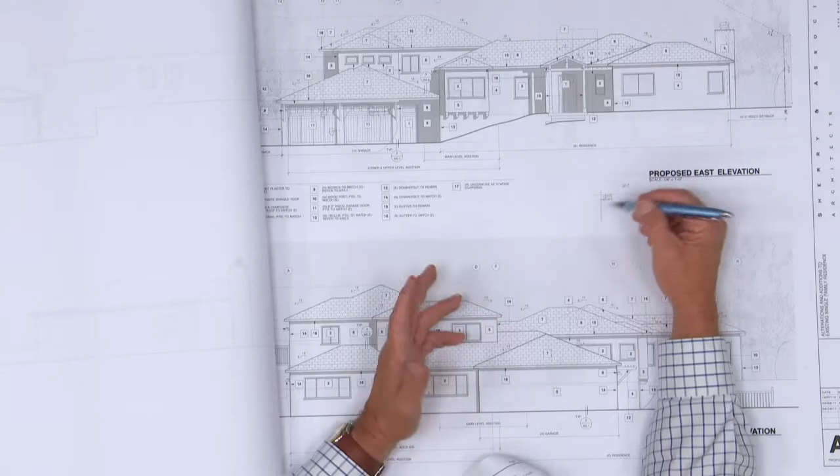It's just not here. Absolutely, yep. Okay, you got it. All right. Anything else? The chair would entertain a motion, and I'm thinking, given where we are, that this could get resolved for final, and I'm going to look at Katie just to make sure, at consent if we so wished.

That's what I - Katie, is that - Yes, Mr. Chair, you could do that. So I would encourage someone to make a motion to send for final approval to consent to pick up the comments on the garage and the pavers. I'd make a motion.

I'd like to continue this project to consent for final approval, based on the comments that we made having to do with the details for the garage door, simple details for pavers, and paving sample.

Okay, that's the motion. I guess that's all we need. Is there a second to that motion? Okay. All in favor signify by saying aye. Aye. Aye. Opposed? Abstentions? So carried.

So what that does is it allows you to go to consent, which meets next week, if you can get it on the agenda. Yep, very good. All right. We all have a tendency to just let those things slide over.

Yeah, but well, then no, that's what we deal with. Yep, no, I hear you, all right, it needs to be done. Okay.

Okay, thank you. Is there any other items before today's meeting? Hearing none, the chair will call the meeting closed, adjourned.